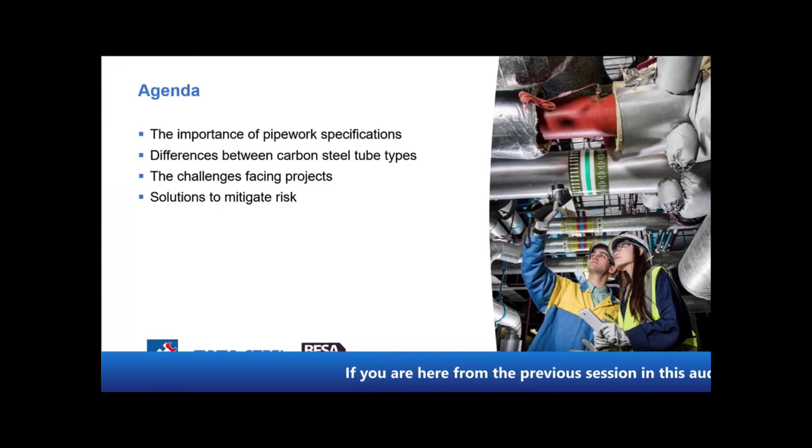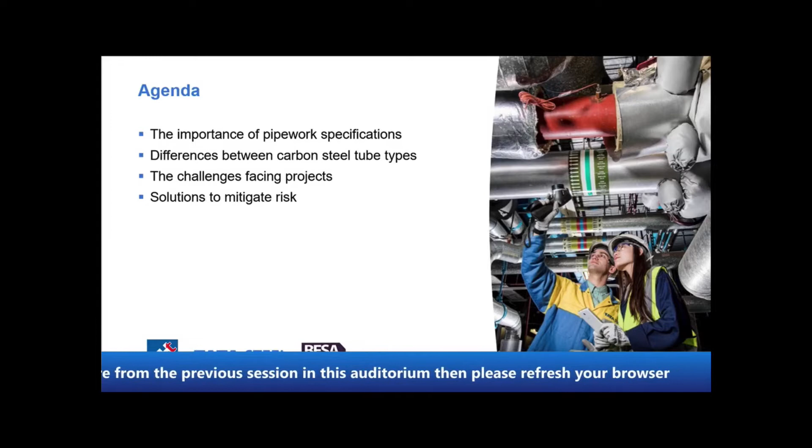I have lots of experience in pipework systems and compliance. I work for Tata Steel Tubes, responsible for building services, heavily involved in pipework specifications and compliance. We thought this presentation would be useful to talk about the importance of pipework specifications, and to explain the differences between carbon steel tubes. This can have a big impact on application suitability of products, and on whether these tubes can be successfully utilized when in service.

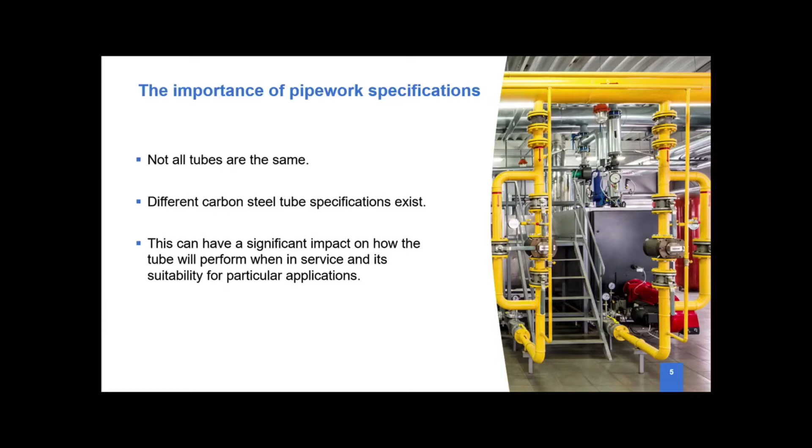So if we look at why pipework specifications are important, a lot of people, when they see pipework on projects, assume all the tubes are the same. Unfortunately, they're not. Tata Steel manufactures a whole range of different products, and we work closely with a number of our competitors, so we understand the differences between carbon steel tubes. In this presentation we're talking about thick wall steel tubes, and there are different manufacturing methods which can significantly affect how those tubes perform and operate in service.

Unfortunately, we have seen numerous cases where incorrect specifications have been referred to, and this has allowed wrong products to be used. We see a tendency of legacy pipework specifications being cut and pasted from previous projects. Because of the increase in tall buildings, we've seen the diameter of pipework increase significantly, and this has resulted in industrial pipework specifications now being referred to. We also see a lot of misunderstandings and legacy industrial requirements being asked for. So unfortunately, mistakes are being made, and hopefully this presentation will allow us to highlight some of those issues.

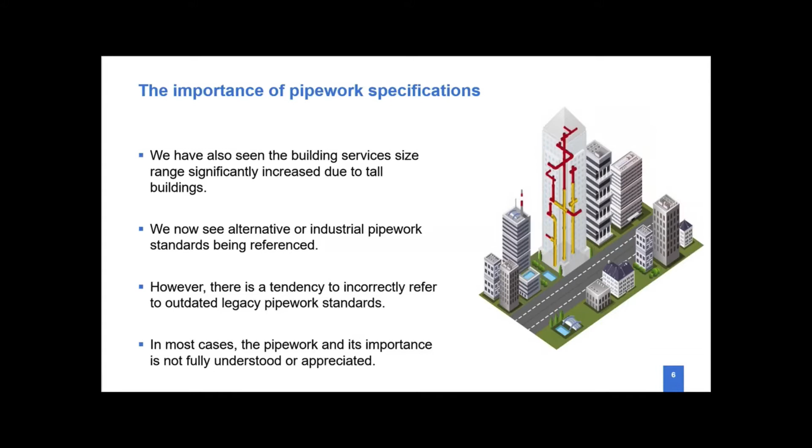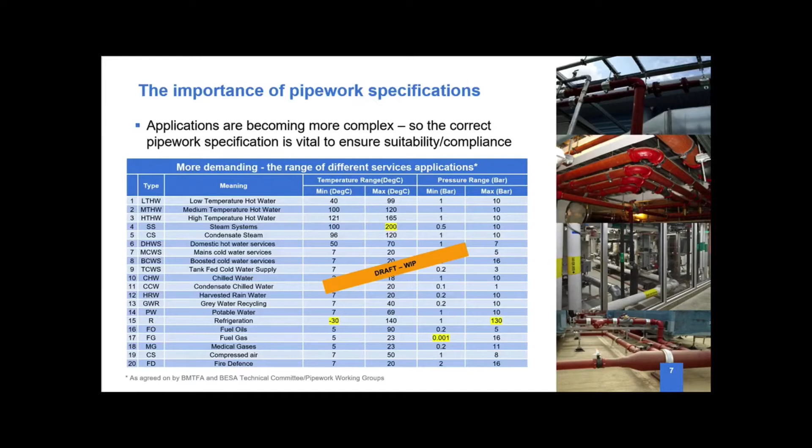And when we look at the type of pressures the systems could be exposed to, again from millibar up to some pressures well above 100 bar. So making sure the pipework specification is correct is vitally important to ensure the right product is installed in these applications, which might have quite high and demanding temperature and pressure requirements.

When we talk about legacy, a lot of people still make reference to BS 1387. This was the go-to standard for the old building services tube. Unfortunately it was withdrawn in 2004, so it's an old, outdated specification. It also only goes up to 6-inch in diameter. So when we see specifications asking for large diameter tube greater than 6-inch referencing this particular standard, we know that's not correct - those products don't technically exist.

We also see a lot of people referencing the API industrial project products within their projects. This comes about from legacy - in the old days, when people wanted larger diameter products, the only thing really available in the UK market would have been the types of American line pipe tube used in the North Sea. That's why we see terminology mismatch, with people asking for medium weight or heavy weight, or schedule 20 or schedule 40. We see a combination of different requirements on projects which doesn't really make technical sense. We understand what the client is asking for, but because it hasn't been defined correctly, it also means other people can misinterpret it and different products can be supplied.

We also see a lot of reference to the old legacy British standards, the 3601 and 3602. Again, they have been replaced.

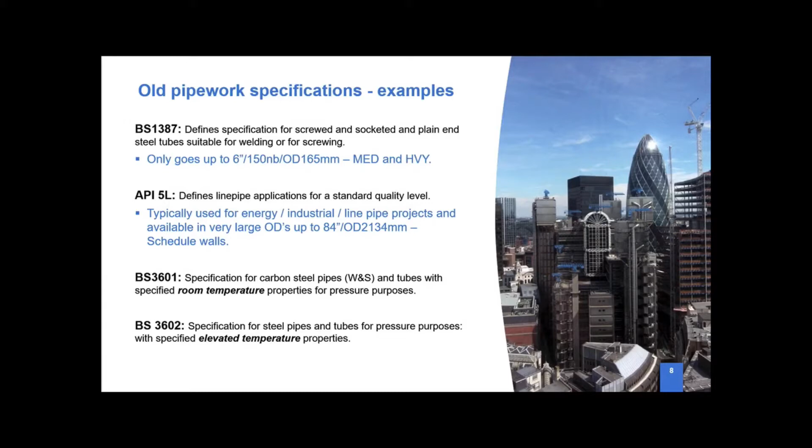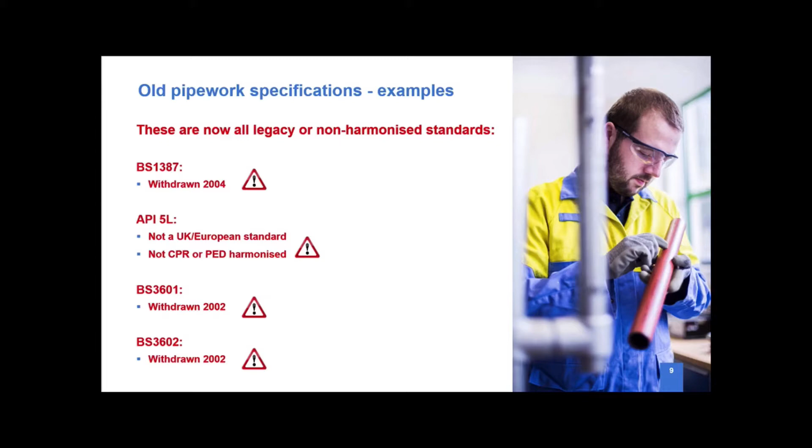Every time we see that on a specification, we know that somebody hasn't really acknowledged the fact that those standards are no longer valid. It's vitally important that people recognize these standards have been withdrawn, because they were withdrawn for a reason - technically they weren't suitable, didn't cover compliance, didn't have the right size, or didn't have the right protocols for validating against European directives and harmonized standards. So legacy specifications are really dangerous if they're still in your project specs.

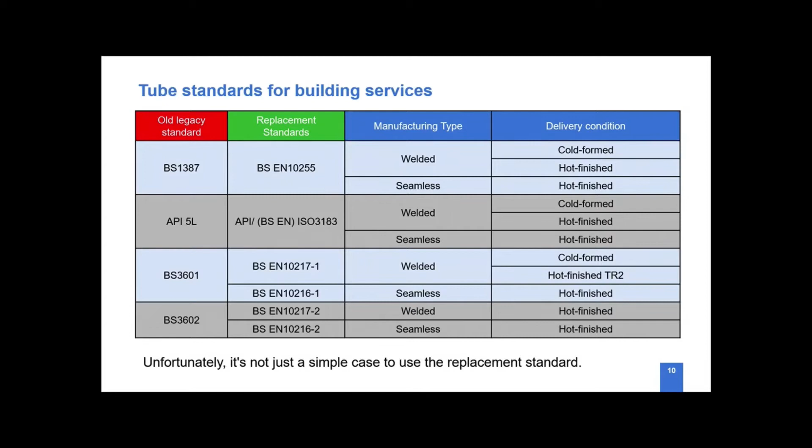Unfortunately, it's not just a simple case of saying, okay, I've made reference to 1387, what is the replacement standard? Okay, BSEN 10255, that's what I want to make reference to. Because the problem is all the replacement standards tend to have a lot of other manufacturing options and what we call technical delivery conditions. This means if you just specify the standard without defining what you actually want, there's still the risk that an alternative or different product could be supplied.

It may be that the first product you use is suitable, but products supplied at later dates could be completely different, therefore behave differently, and if installed in the same system, run the risk of cross-contamination, as we call it. So you can see most of the standards either have a welded or seamless production option and can be supplied in either a cold form or hot finish condition. We'll talk about this a little bit later on in the presentation.

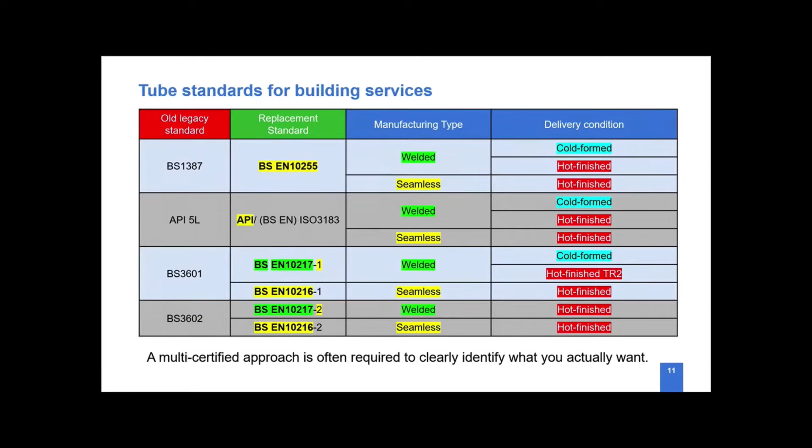The other thing which is very important to notice is most of the standards which we now work to today as a tube manufacturer actually come with a variety of different grade options. And most of the specifications we see don't tend to really highlight what grade is being referred to.

Now this is important if you're looking at pressure integrity, because the stronger grade of steel, the higher the pressure integrity is. But also if you specify grades, you can look at weight savings by having thinner walls. You can look at defining the technical delivery conditions exactly, so you know what sort of compliance, whether the product is suitable for ambient temperature or elevated temperature use, and also what type of harmonization it has with particular standards and Euro norms, and what type of certification and testing protocols will be followed as well.

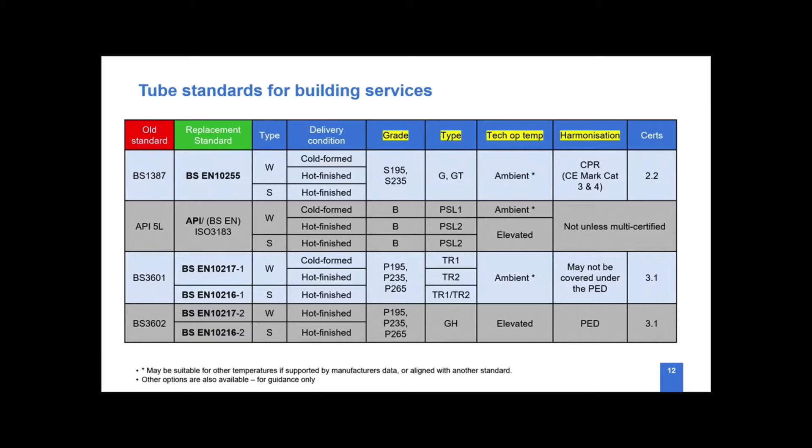So just specifying 10255 by itself is defining loosely what you want, but you can see without specifying whether you want a welded tube or seamless tube, or what type of grade or technical delivery condition, there's still a bit of a question mark with regards to what you're actually going to get delivered to site.

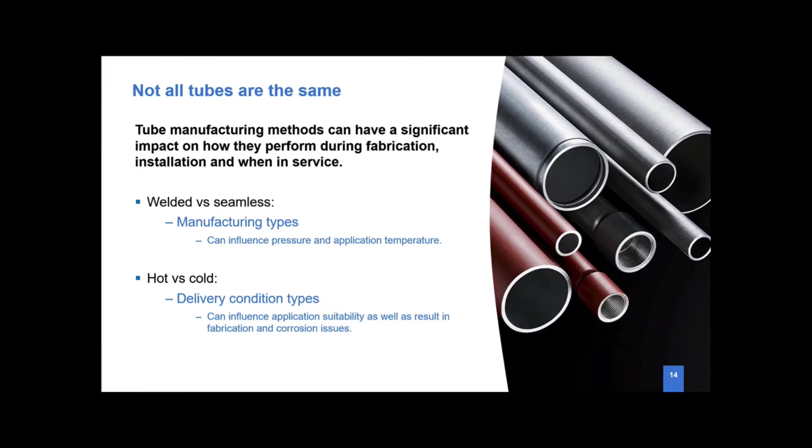Now it's important when we talk about the differences between tubes because, as I said, the manufacturing methods do produce different characteristics. So we're going to talk roughly about the differences between manufacturing types and then the technical delivery conditions.

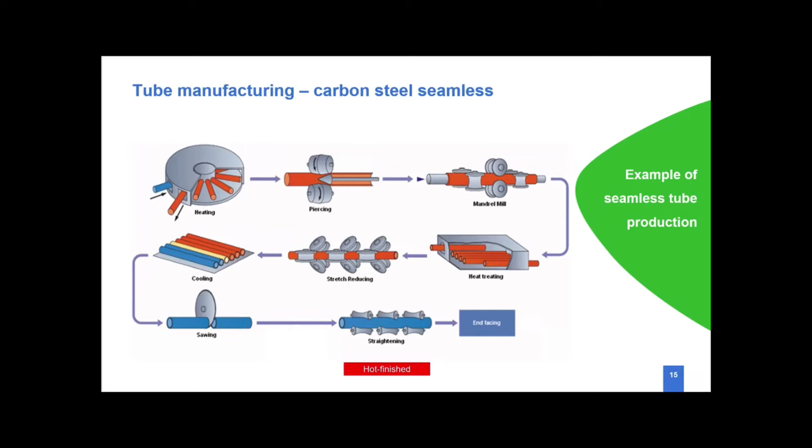However, when you look at the manufacturing process for welded tubes, there are actually two different types. The first option would be a cold form tube. So instead of using a billet like a seamless mill uses, we take a coil of steel, form it into the tube profile, and use a high frequency induction welder, which superheats the ends of the strip and we squeeze it together. There's no filler material used. That then basically produces a cold form tube.

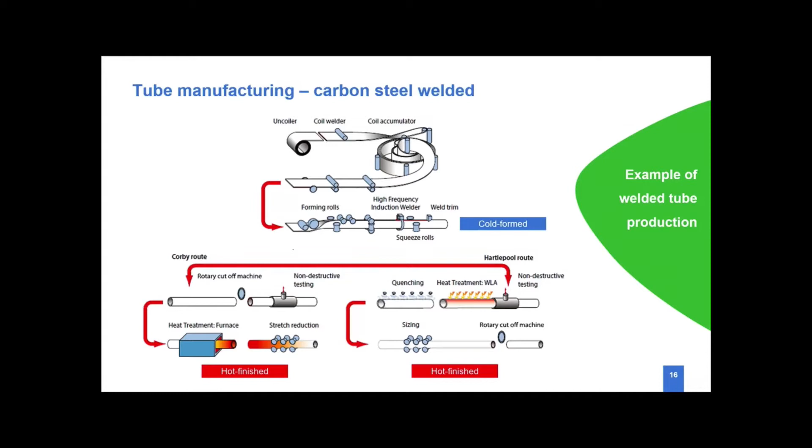We then take that tube, which has a heat affected zone, a weld seam, and we actually put it through a furnace and take it up to temperatures of about 1000 degrees C, which allows that weld seam to basically disappear. So a welded tube can be seen as being equivalent to seamless only if it's gone through a heat process, a normalizing process.

One of the advantages that welded has over seamless is that because of the way we form it, we have very tight control of the tolerances. So when it comes to ovality, consistency of wall thickness, and end matching, a welded product will always be seen as being technically better than a seamless tube, which unfortunately can suffer from out of roundness and inconsistencies on the wall.

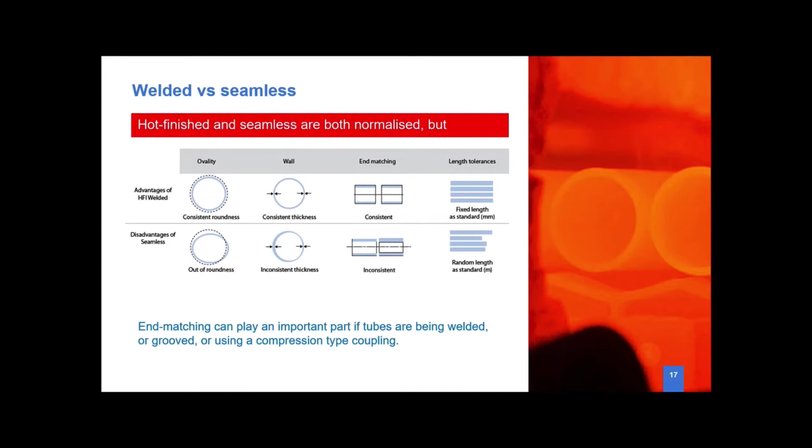However, we know that because of the manufacturing process route which seamless follows, because it's being extruded, its grain structure is aligned better to that within a welded steel chemistry, which means that a seamless tube can be able to withstand higher temperatures than a welded tube.

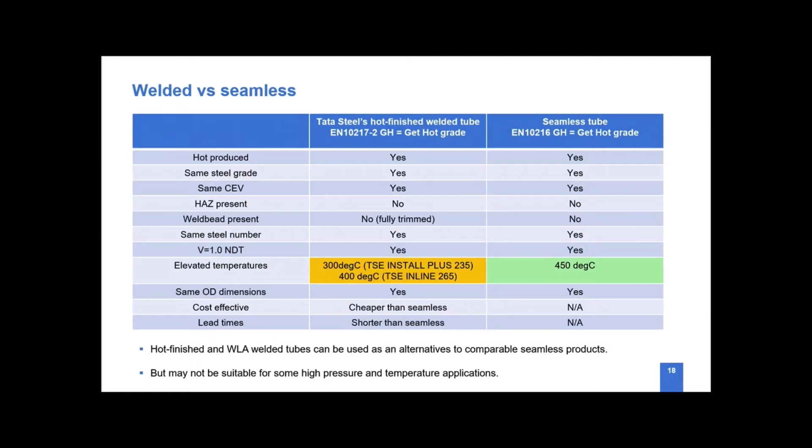Because a seamless tube can be extruded, it can have thicker walls, so it can satisfy higher pressures. But in most building services applications, a welded tube, as long as it's normalized to part 2, a hot finish, will be able to take temperatures up to 300 and 400 degrees C and quite high pressures. But there are some industrial applications where we'd recommend a seamless tube gets used.

The big difference to highlight when people don't specify the tube specifications correctly is this hot versus cold form. In the welded process route, everything starts off as a cold form tube, and you can see this heat affected zone - the area where if you cut through the tube, we have this discoloration. This is because the microstructure in that area has changed. It's distorted, so it's very brittle. We have a hardness area across there, which is different to the rest of the tube body, which may also be experiencing stresses as a result of the forming process.

By normalizing the tube, we actually remove all that stress and realign the microstructure of the steel, so we end up with consistent properties. It also means the product is more suitable for higher temperatures and pressures than cold form, and more importantly, because it's been normalized, it's also able to resist the initial onset of corrosion and can be manipulated and fabricated more without increased work hardening and failures.

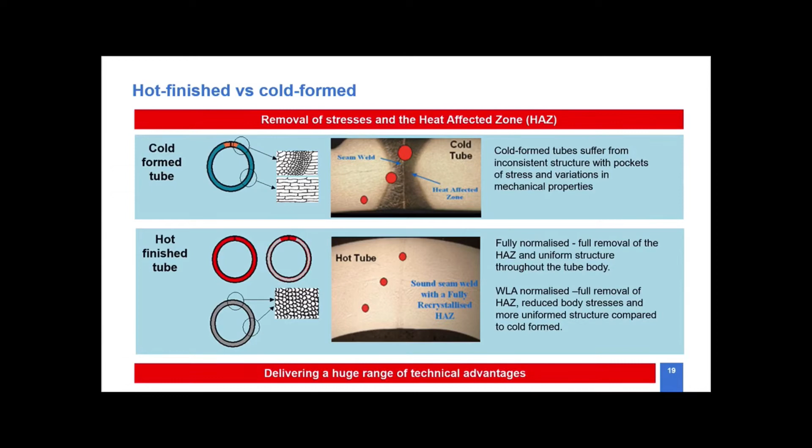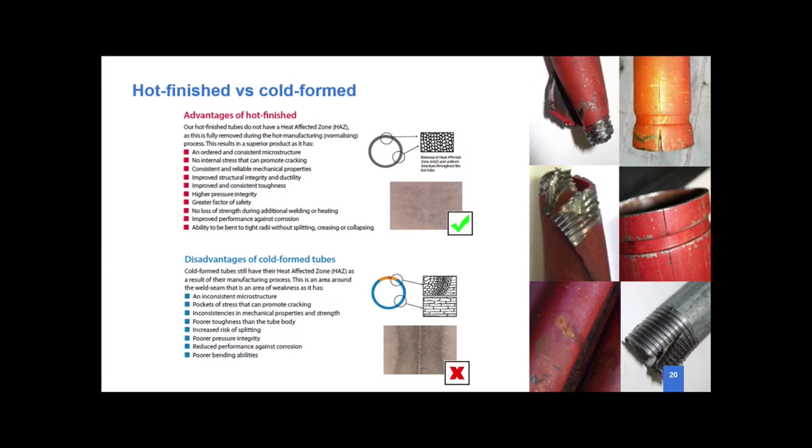We've worked very closely with the market and analysed the different products in terms of cold form and hot finished, and we've got a number of advantages which we can promote with the technical solutions that hot finish offers, and we've seen this time and time again. This is why it's vitally important to ensure that when you're specifying a product, you're specifying it correctly, so you can see that either seamless or welded, hot finish or cold form, has been correctly identified, because it does make a big difference when those tubes are being used in service.

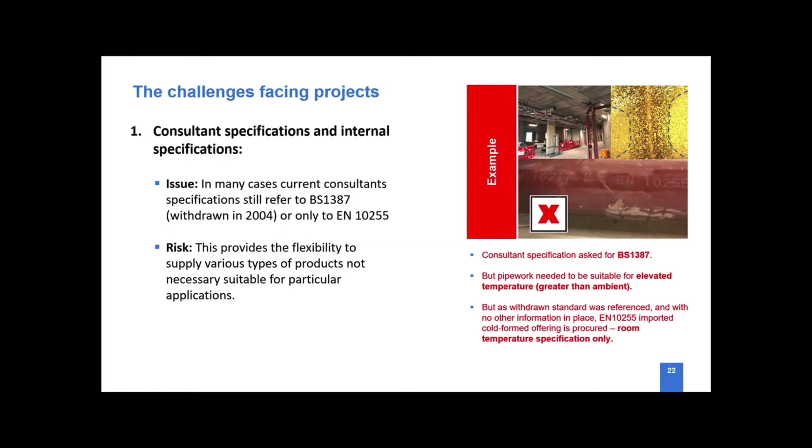We've got examples of people believing they can define the right standards for tubes, but obviously they can't. What they're trying to do in these situations is put as many standards as they know, thinking they'll be covered with any possible options.

Then we know there's EN 10255, which is not alloy steel, pipe suitable for welding and threading, at specific temperatures, by defining the correct grade, and also information about the CE mark to CAT 3. For the larger sizes, obviously similar description applies, or simply we can define the Tata Steel product, which is 235 or 265, which comply with both requirements.

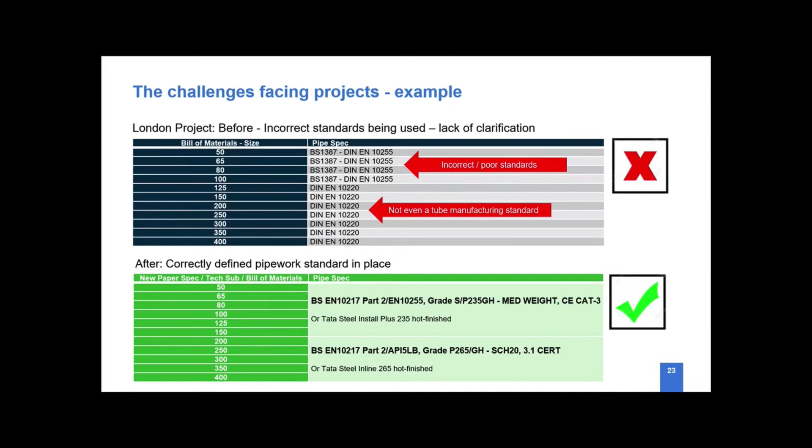Another big challenge is the supply chain - there's a general lack of understanding of materials and applications. There's a huge skill gap within the industry, with lots of people leaving. We rely many times on the supply chain to select the right product, so if there's no expertise within this part of the industry, we are in huge risk.

Decisions most of the time are driven by cost reduction and the variety of alternative products available on the market from international suppliers. In general, there's poor awareness that such alternatives are not always manufactured or tested to any current British or European standards, or have the required traceability or consistency.

Again, we've got an example from one of the projects where the specification was to BS 1387 and was supposed to be used for gas, so there was a requirement for the declaration of performance, a CE marking to CAT 3, under the fuel and gas requirements. But this was not clearly communicated, and unfortunately non-CE marked material was supplied to the project. The installer hadn't realized this, so many different tubes were supplied to the job, making traceability and addressing quality concerns a huge challenge on this particular project.

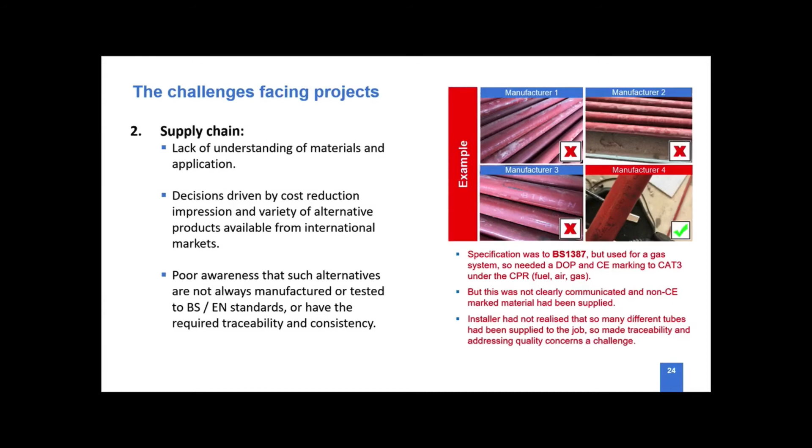Another two examples of supply chain issues found on the internet are quite current. There are medium-sized distributors on the UK market offering carbon tubes to our projects. In the left example, you can see this particular distributor is referring to standard BS 1387 and stating that the pipe diameter is 300 millimeters.

That is even not correct, because BS 1387 never went up to that size. Also, the grades stated below the pictures, referring to different grades, cannot be achieved under BS 1387. They are referring to sizes DN 200 and above, which is not covered under BS 1387, so we can see the huge risk that could be put on any project if they supply pipework from this particular supplier.

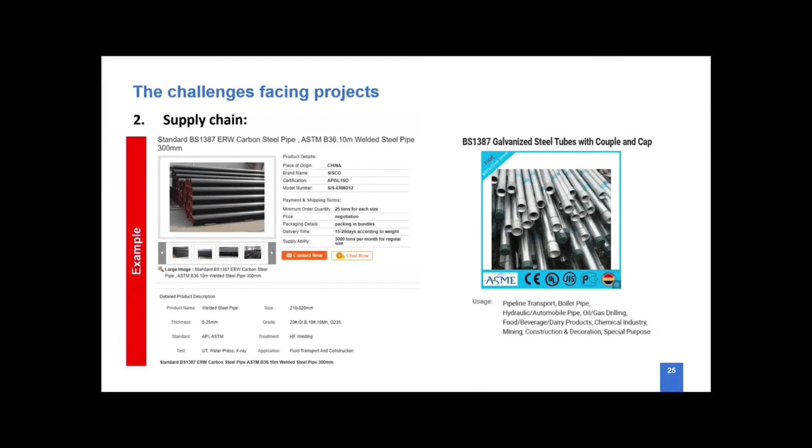The other example is again BS 1387 galvanized steel tube, where the distributor highlights every possible system from the construction industry that this pipe is suitable for, and adds every possible certification available in the industrial market to certify the pipes, which is obviously incorrect. He's referring to American standards, CE marking - but you can't CE mark BS 1387 - and other Japanese standards, which is really worrying in terms of what kind of tubes are reaching our projects.

Subcontracts - in many cases the main contractor relies on small subcontract firms for a big project. However, due to lack of awareness, or to take advantage of generic and flexible consultant specifications, cheaper and alternative, incorrect products are being used most of the time.

In this particular example, the technical specification for this project was correct, stating the correct tube, but due to a subcontractor, the specification got diluted as part of the project being subcontracted out. Alternative material was supplied as Part 1, which was cold formed, not Part 2, which was hot finished and required for this particular project. The tube documentation did not match the project specification during final QA checks, and unfortunately it had to be removed, causing huge delays and cost implications to this project.

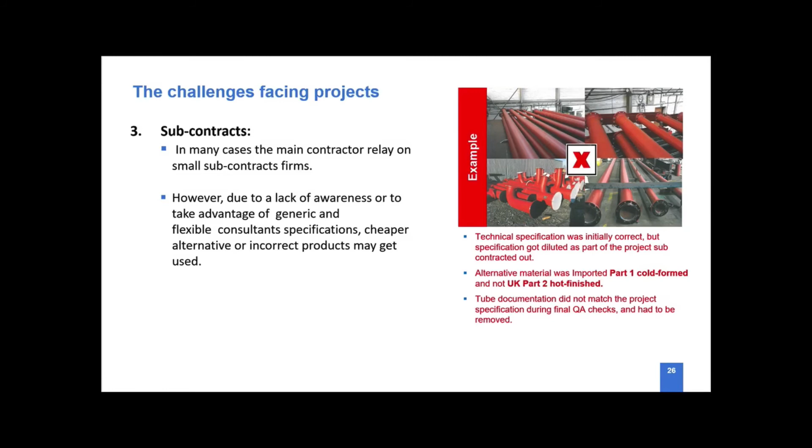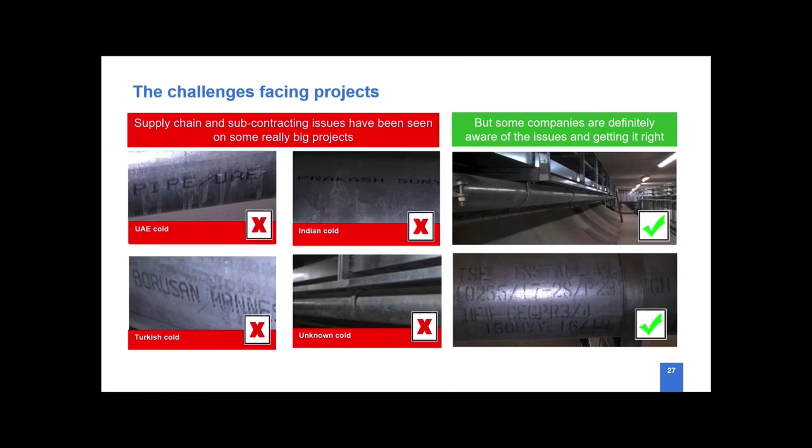Another example - as I said, on large projects the pipework packages sometimes get split into a number of different subcontractors, and we've seen one project where 3 subcontractors did one pipework package across different project zones. In one particular example, you could end up with 4 different pipes coming from 4 different markets, none of which are compliant to our projects. But there is light at the end of the tunnel - some companies are definitely aware of this issue and getting things right by defining exactly the pipe specification at the design stage before it's procured.

The next point is the solutions, how we can mitigate this risk. As Crown House, we've been working quite intensely with Tata Steel, and we developed in-house minimum requirement specifications to ensure selected tubes are compliant to current standards.

Those preferred product specifications are then submitted to a consultant and client as our offering. So it's sort of reverse engineering, where we tell the consultant and client what we want to use to build the system. We know we've proven these components on particular projects, and we know they definitely work.

Crown House also developed a list of preferred manufacturers and suppliers that can be used on our projects. Normally we have a list of preferred and approved suppliers that is constantly updated, and every new product needs to go through internal technical review before it reaches this list, and needs to be accepted in order to be allowed on our projects.

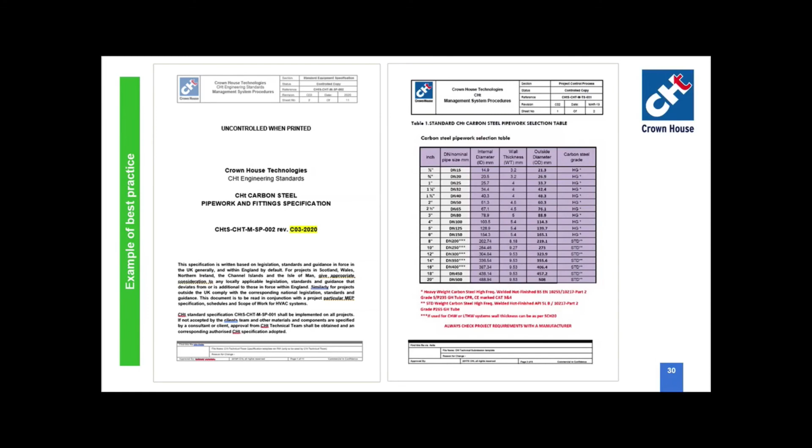As I mentioned before, we develop a set of in-house engineering standards. This particular one is a specification for carbon steel. The difference is that we are providing a specification for the system, not just the tube. Within this document you can find information on the grade of bolts and nuts used, washers, flanges, valves that are compliant with this particular system, and the correct pipework specification that can be used on the project. So it's the definition of the system, rather than trying to define independent components that don't necessarily work together.

The other set of documents, on top of the engineering specifications, are the technical submissions, which are again very detailed and verified prior to use on any project. These are the generic standards, and within these technical submissions we go into detail exactly about the pressure rating and all technical parameters of this particular tube selected for a project.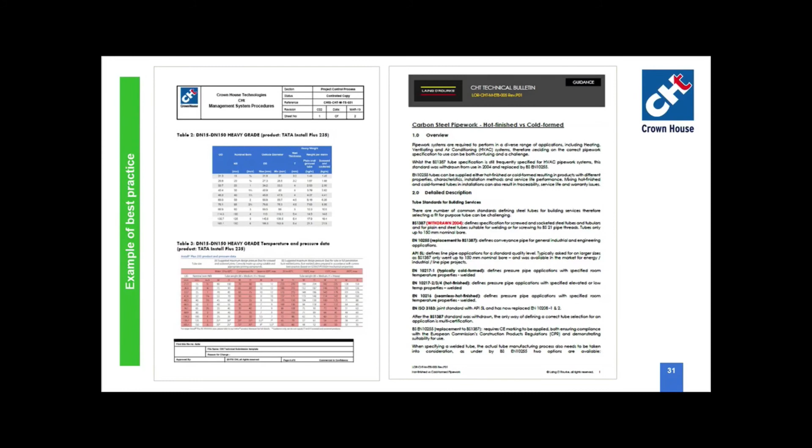Also, we tend to issue bulletins quite often that give updates to our different teams on the projects. Restrictions also apply to our subcontractors working on our sites. Basically, they need to follow our internal standards, and CHT internal standards are part of the contract with our subcontractors. By minimizing the number of suppliers and manufacturers, we are enhancing relationships with the supply chain and mitigating the risk of using unapproved materials.

As an example, we work with four main distributors, and they are really aware of our projects and our standards. They know what we've specified in this example for a tube. We've had a few phone calls from them telling us that our subcontractor was trying to purchase cheaper, non-compliant pipe for our projects. This awareness is quite beneficial for both sides, because these distributors are educated on our standards and can stop incorrect pipes from being supplied to our projects at this level.

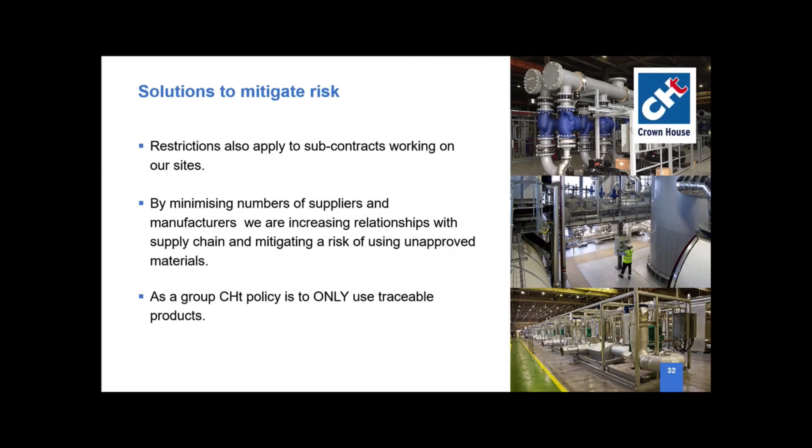As a group, Crown House Technologies policy is to only use traceable products. So by correctly defining what we want to do.

Solutions to mitigate the risk - other measures can be implemented on our projects or with our teams. What about site inspections? Training is really vital - not only to site teams, which I believe is really too late to reach, but also to our procurement. And working alongside material specialists like Tata Steel to ensure the compatibility of materials used within our systems is correct.

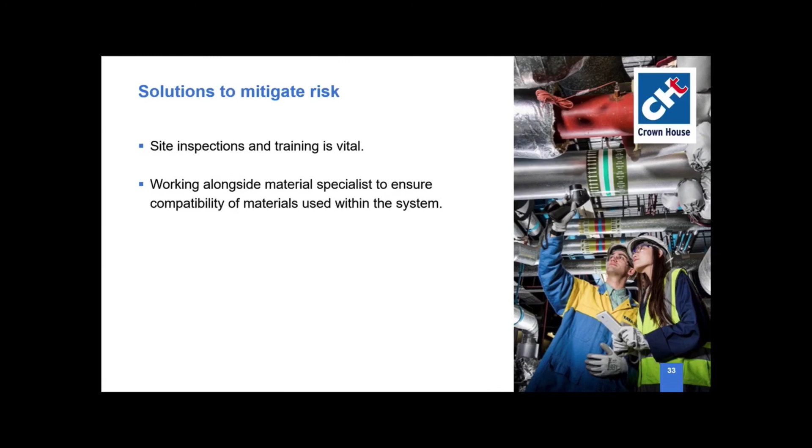So just to conclude, obviously I'm conscious of time, there's quite a few things we've talked about, and I know some people have questions, but we'll take those offline. Basically what we wanted to get across today was the fact that pipework specifications are important. Mistakes have been made, however, working closely with industrial partners such as Crown House, we've been able to put in place procedures and policies which allow us to reduce the risk of incorrect material being used.

We're not saying that materials are not suitable for particular applications. We're just saying that you need to define which are the correct materials for particular applications where pressure and temperature may be an important factor.

We've been doing a lot of work with BESA and other trade associations to try and improve awareness of this issue. The BESA Pipework Technical Committee has been meeting and working on a regular basis, and we hope to have some exciting news to roll out next year about guidance documents and pipework selection tools, which will make it a lot easier for people to understand which is the right tube specification for their particular jobs.